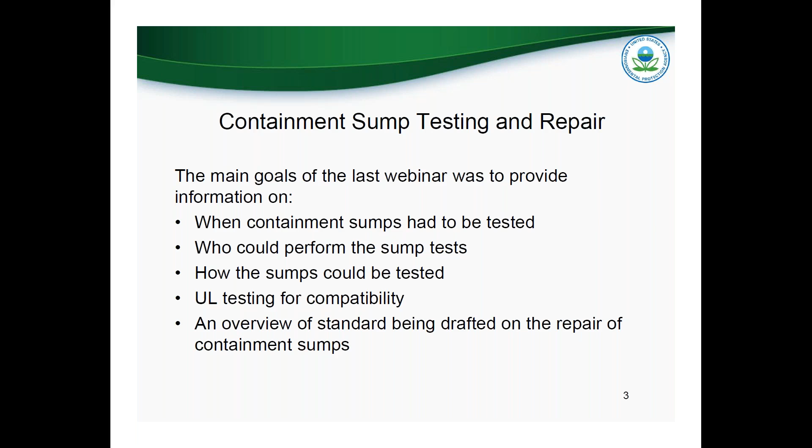The main goal of that last webinar was to really get into when containment sumps had to be tested, who could do the sump tests, how the tests could be conducted, a little bit on compatibility, but to introduce the overview of the standard being drafted. We're building on that today, looking at the containment sump repair. As Drew mentioned, I'm going to start off taking a look at some requirements for containment sumps and moving into what about repairs of those sumps.

Tony Rieck is going to come and really do a wonderful detailed job walking us through the standard itself, looking at a couple of key issues like what sumps can be repaired and what are those allowable methods that can be used. And Ed Kubinsky is really going to come in with some really wonderful examples of sumps that can be repaired, sumps that can't be repaired. And so we're really going to hopefully answer a lot of questions here.

So as I said, I'm starting off with some requirements. So the first aspect of the requirements is when are containment sumps required? So everybody should be hopefully familiar. New dispensers, when they're installed, they have to have under dispenser containment. And if the owner operator is going to be using release detection in the form of interstitial monitoring, they're going to need to have a place to do the monitoring, and that's going to be typically the containment sump.

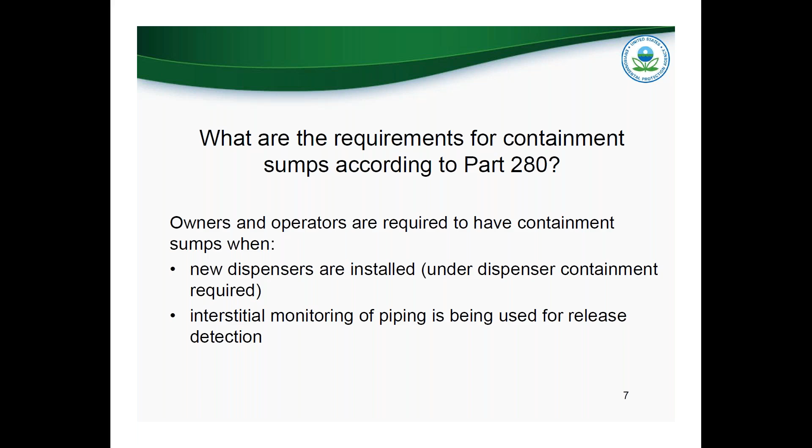So when we have sumps out in the field, what are owners and operators required to do with these sumps? Well, the one that we took a look at before was testing. And I really encourage, if you need more understanding of when sumps have to be tested, when they don't have to be tested, please go back and look at that webinar.

But the other aspect that we didn't touch on before is all people that have these containment sumps are required to do walkthrough inspections. Those walkthrough inspections are for every operational containment sump. With one caveat, if there's an under-dispenser containment that has to be filled with pea gravel or somehow inaccessible for a visual inspection, those have to be electronically monitored for leaks. They really can't have a visual inspection.

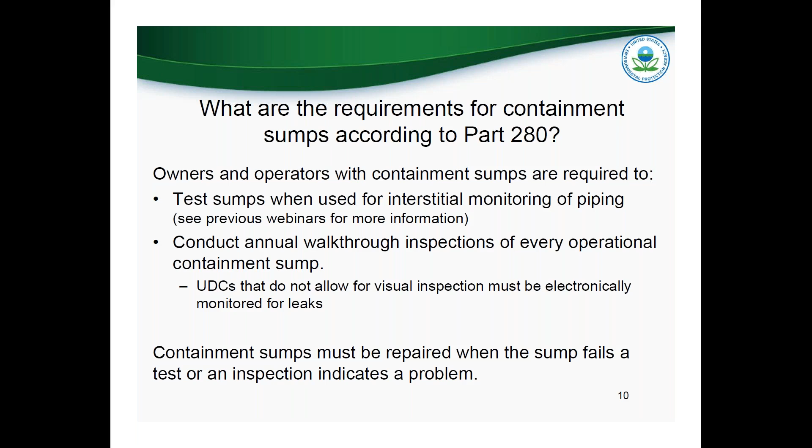But the important thing is, as we're working with these containment sumps, they have to be repaired. When the sump fails a test, or they get out there and do an inspection, and the inspection indicates a problem, there has to be a repair completed. Which brings us to today's session, really.

So the repair of containment sumps is addressed in 280.33. A couple of things to be aware of: one, it has to prevent releases due to structural failure or corrosion, so it has to be a good repair. The second point is that it has to be properly conducted in accordance with a code of practice.

Now, if you remember the other parts of the regulation, there's a lot of times where there's options presented, so it could be a code of practice, a manufacturer's instructions, or something the implementing agency allows. When it comes to repair, those are not options. What we're dealing with here is it has to be done in accordance with the code of practice.

Second part to that is, up until now, there's really not been a code of practice for the repair of containment sumps. EPA got involved with NLPA and other groups to try and come up with this standard, and we're very happy that NLPA did a lot of great work to pull this standard together.

Last point on the repair of containment sumps, it's not directly in 280.33, but keep in mind that whenever a sump is repaired, that repair has to be compatible with the substance stored, and there's going to be a need for records if it's going to be more than E10 or B20.

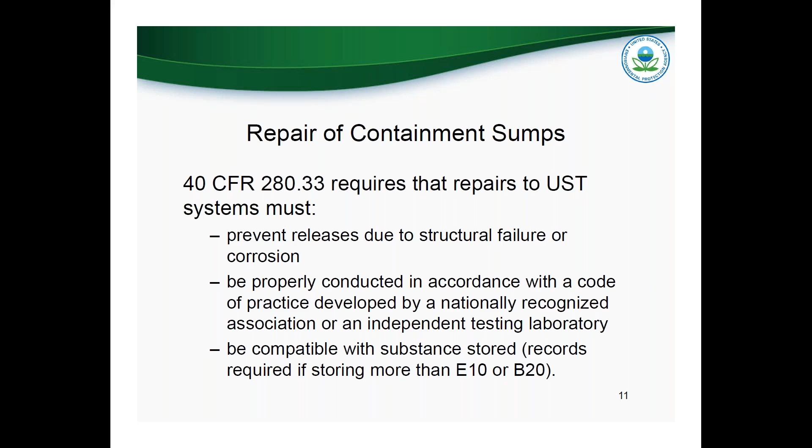Last part of the repair of containment sumps is looking at the aspect of when it gets done, there needs to be a test. Now, the test is required specifically for repairs of containment sumps used for interstitial monitoring of piping.

But obviously, if a repair is done and it's needing to be repaired, it's a good idea to get it tested. With the test, options are provided: manufacturer's instructions, the code of practice, or other requirements developed by the implementing agency. The code of practice has the standards in there for how it's to be tested, and we certainly encourage the use of that code of practice.

Last but not least, everybody should be aware the technical compendium is out there, and EPA did recognize the standard. We have a new section in the compendium dealing with repairs of UST systems, and that is explained in more detail at that point. So that's the quick overview, taking a look at the regulatory framework for UST repairs, in particular for containment sumps.

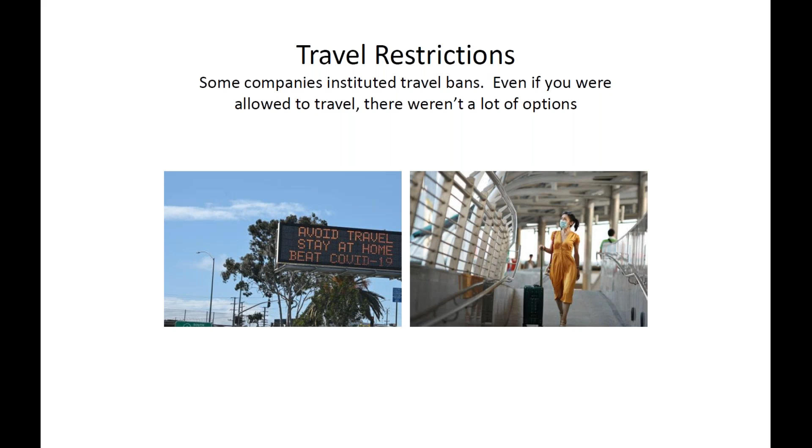So not a lot of people flying, risks of mandatory quarantines, limited food options while traveling. That just really meant that there weren't going to be the same meetings that could otherwise occur. So the meetings had to change.

And we have people that were working from home. We had people that were on different platforms as far as the meetings. Every company seemed to have its own platform, and sometimes they weren't compatible with one another. And so meetings were different.

And not all of the things that changed were compliant with the NLPA Standard Development Protocol. The NLPA Standard Development Procedure requires a minimum of 2 meetings. The first is an organizational meeting of the committee, and the second is a ratification meeting to consider comments and formally approve the standard. We did eventually get both of those meetings in.

The first one wasn't so hard because it happened right before COVID became a major concern. And it's really important to understand how meetings help. Face-to-face, there's no substitute for being able to sit down with people and actually hash out issues.

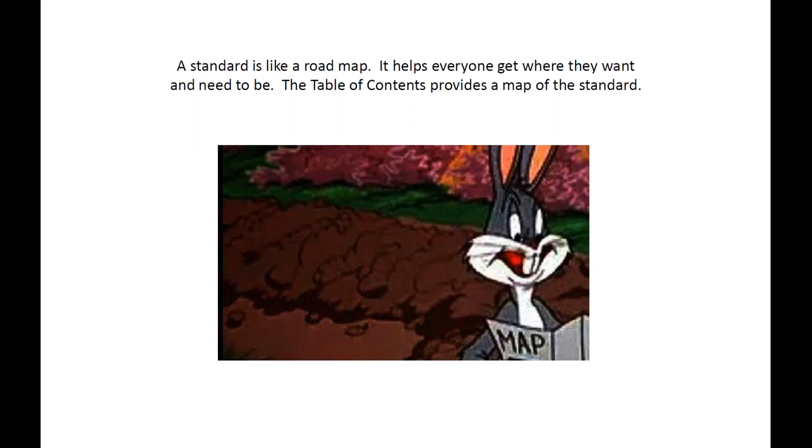Well, my view of a standard is it's like a roadmap. It helps people get to where they need to be. The table of contents is a map of the standard. And here are the different things which were addressed, and I'm going to go into each of them individually.

Introduction, scope, reference documents, terminology and definitions, which you find in just about every standard. Significance and use simply says how to use the standard. Permits, plans, testing for tightness, and final report.

Material approvals, sump evaluation, training and certification of installers, general safety considerations, sump fittings, procedures common to all work, sump structural repair, in-situ sump construction, sump fitting installation, repair, replacement, or construction of sump lids, testing and return to service, sumps made from other materials of construction, and keywords, and then finally contact information for the association.

So there were 4 methodologies addressed in the standard. One was sump structural damage repair with applicable structural adhesive bonders or patches. 2, repair or replacement of sump entry and test fittings. 3, field constructing a retrofit single wall or double wall sump without removal of the existing sump. And 4, repair or replacement of sump lid assemblies to address surface water intrusion.

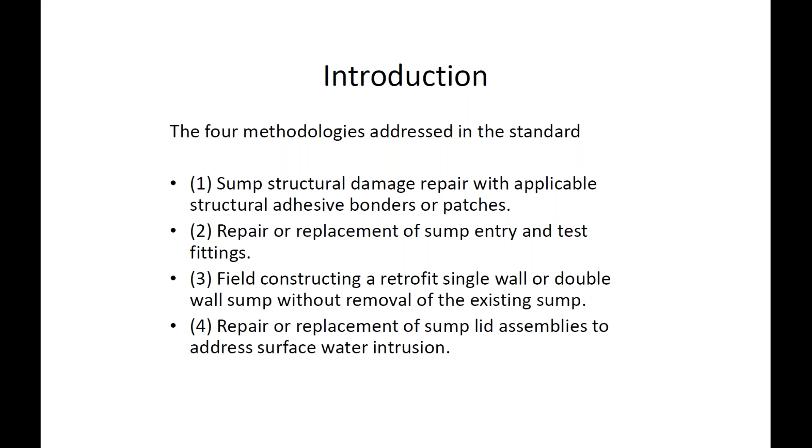Our scope simply was the intent of the standard. The repairs to sumps need to be performed in conjunction with or independently from replacement of or repair sump fittings. In other words, you may have to replace sump fittings. You may not have to replace sump fittings. You may have to repair a crack or a hole from impact.

That might not correspond with the sump fitting needing replacement. Sump penetration fittings may be installed or replaced independently or in conjunction with other procedures contained in this standard.

A watertight lid assembly was something we wanted to talk about, because one of the ways water gets into the sump is through the top. And of course, in-situ sump manufacturing simply uses the existing sump as a mold for the fabrication of a new sump.

Strength and flexibility. The strength is in the language. You want language that is truly enforceable, using words such as will, must, and shall, to make it easy for the standard to become adopted and enforced.

Flexibility is also required because what exists today might not reflect what's available tomorrow. For example, when the recommended practice was written, there was no such thing as a repair fitting.

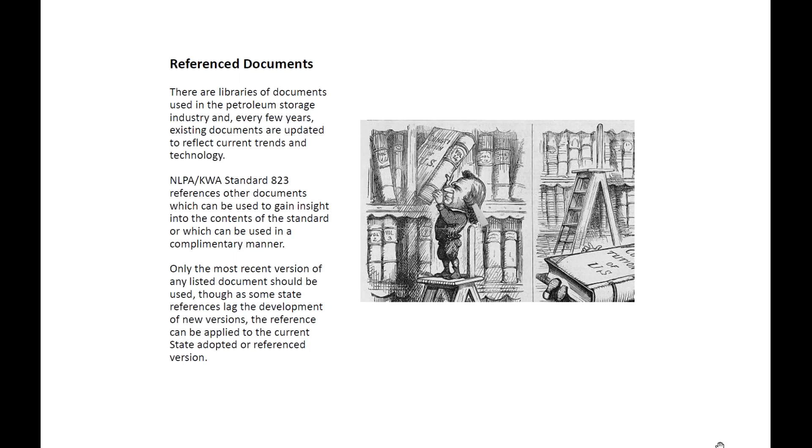Terms and definitions. We wanted to make sure that the definitions we used for terms consistently used within the industry were the same as those for other groups that have standards and recommended practices out there. PEI, API, and NFPA, for example—we checked their definitions against ours to make sure they were at least pretty close, if not exactly the same.

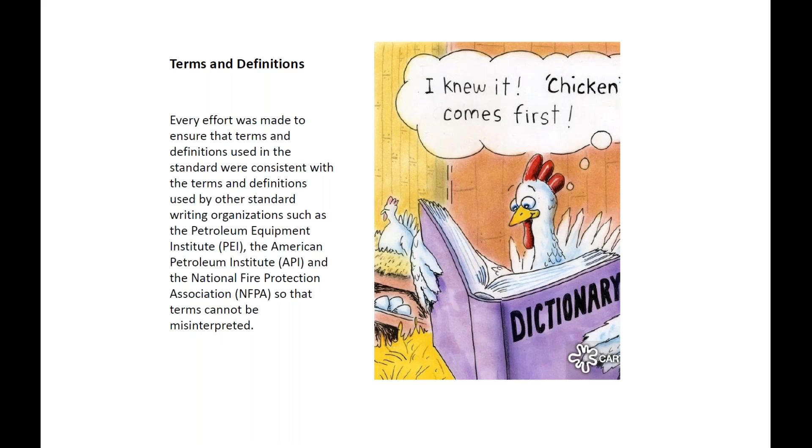Significance and use simply says what the standard provides and how it's to be used. So the standard provides testing and performance requirements for materials used to perform sealing of containment sumps. It provides testing and performance requirements for materials used to perform repairs.

It provides minimum criteria for qualifying a containment sump for repair. And the standard provides test and performance requirements for materials used to perform the installation or replacement of a sump entry fitting, not only from a compatibility standpoint, but also from a standpoint of suitability for use.

The standard provides testing and performance requirements for materials used to perform the fabrication of that new single wall or double wall sump, using the existing sump as a fabrication mold. It provides minimum requirements for installer certification and training by the equipment or material manufacturer, which the manufacturers felt was really important—they've designed these materials and equipment for field use, but want to make sure it's installed properly so it doesn't get a bad reputation.

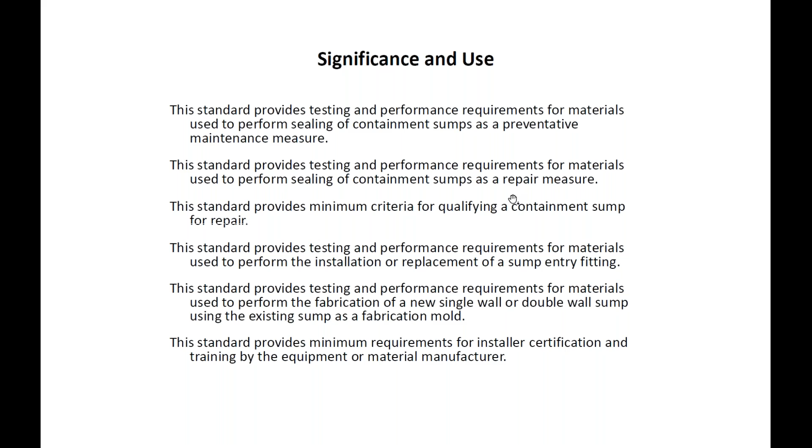And of course, you have to comply with all the rules and regulations for the jurisdiction where you're performing the work. Part of that is making sure you have proper permits, that your plans are approved, and that you're testing for tightness upon completion of the work in order to assure the regulatory agency that the work was done appropriately.

Material approvals. Like I said before, the standard requires all materials to be tested for compatibility, but also tested for suitability for use as to its performance in its intended utilization.

Compatibility assurance is based upon laboratory testing and attestation by the manufacturer. Both are required under the standard. EPA regulations allow for the manufacturer simply to attest that the material is compatible. The standard requires that the manufacturer base that attestation on independent third-party testing in order to make sure there's a basis for that attestation.

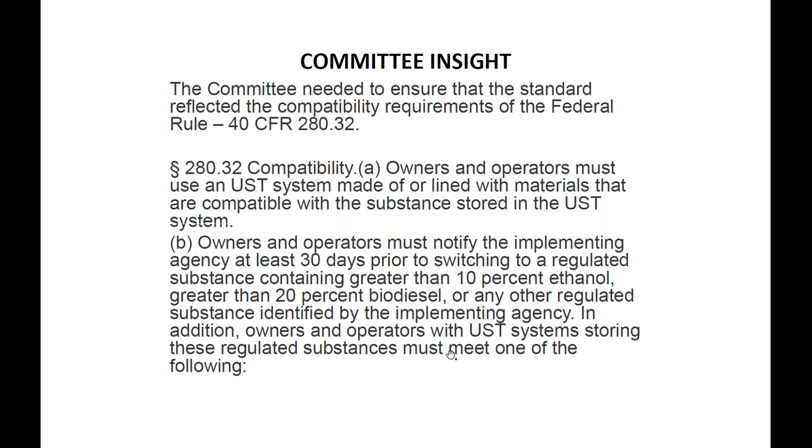And there were different ways of demonstrating compatibility with the UST system. One of those said that equipment or component manufacturer approval must be in writing, indicate an affirmative statement of compatibility, specify the range of biofuel blends the equipment or component is compatible with, and be from the equipment or component manufacturer. So that's basically just saying the manufacturer can say, yeah, this is compatible.

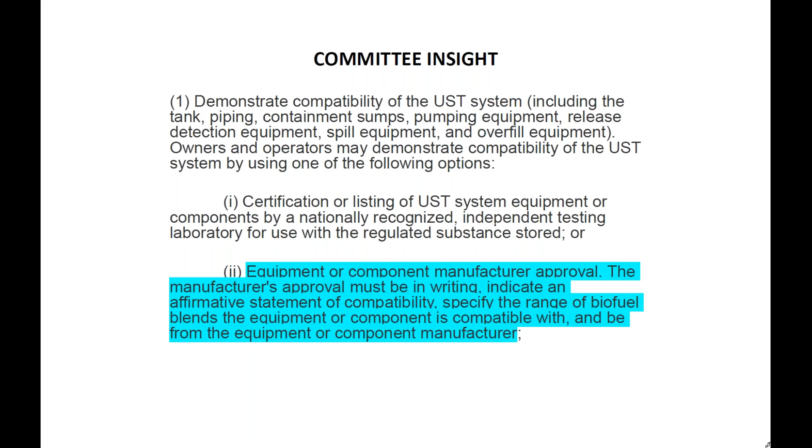The standard, however, said that we want a little bit more than that. We wanted the manufacturer statement of compatibility to be based on third-party laboratory testing results. Now, that doesn't have 'nationally recognized' in there, because that's sort of limiting. This opens the door to the use of regional or local laboratories who have the equipment and expertise to make the determinations, following test procedures as, for example, laid out by ASTM.

So our agreed upon language was: the manufacturer shall attest in writing to the compatibility of the equipment, component, or material, including a specific and stated range of biofuel blends, based upon the results of testing performed by a qualified independent testing laboratory. Additionally, the committee agreed that compatibility assurance alone was not enough, that the testing had to determine that the material...

Your audio dropped there again, Tony. This is Drew, sorry to interrupt. We lost you at the materials testing. We'll hang tight and hope it comes back. Still no audio. Still not hearing anything from you, Tony. I'm not touching anything, so I don't know. We're hearing you now, I think it might somehow be your connection with your phone, but thankfully it's coming back. We're having power issues here. There's a power drop every now and again, I can see the lights go off on my backup power. So that might be it.

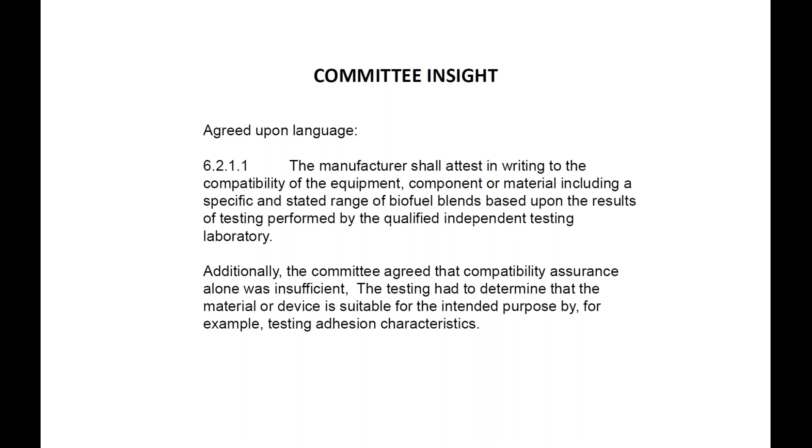Sump evaluation: the question becomes, is it broken beyond repair? Fiberglass materials are very amenable to repairs. Unless you have something really strange happening with a fiberglass sump, you can almost always add more fiberglass and resin in order to make a repair. There are exceptions, such as a fitting that's right up against the wall of the sump, which makes it so you don't have access to the area to repair it.

But polyethylene sump repairs were looked at differently. Polyethylene is defined in some sources as a non-cementable material. Simply, what that means is that you can't glue stuff to it. So when the recommended practice was out there, there was a prohibition about repairing polyethylene sumps, because there was no material known to be able to repair a crack or a hole in a polyethylene sump.

Well, lo and behold, several different manufacturers have developed materials which can be used in order to fusion bond a polyethylene sump. And it's not the heat-treated polyethylene bond that the polyethylene industry utilizes, but rather a chemical process which melts the surface of the polyethylene sump and allows the repair material to mix with the polyethylene material and creates both a mechanical and a chemical bond.

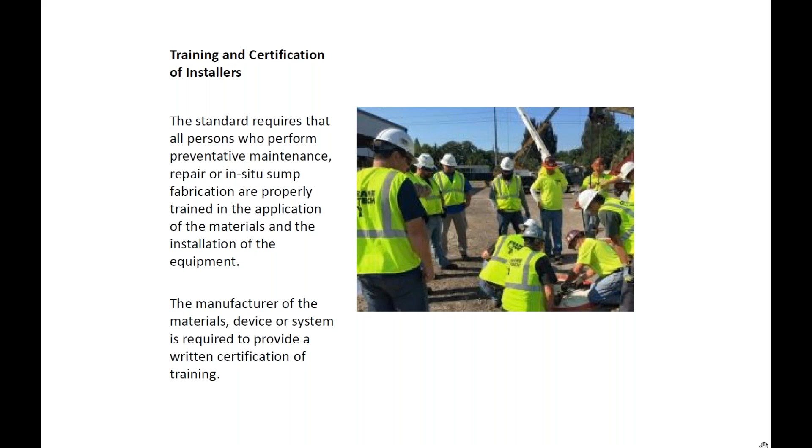And of course, we have general safety requirements. Every time I put on a safety class, I understand that the biggest concern of petroleum contractors is John Q. Public. How do we keep John Q. Public from driving their vehicle into an excavation? How do we get them to not flick cigarette butts into the sump we're working in? And some safety considerations aren't exactly possible to enforce. You can't legislate common sense.

And while I said it's impossible to anticipate every safety need in a complex and varied workplace, the basic guidelines for safety, such as being able to provide barricades to separate the workplace from the public access, were included within the standard, along with things like lockout and tagout, traffic control, and personal protective equipment considerations.

So sump fittings. Well, there's a lot of different types of sump fittings. And it wasn't until I was on this committee that I realized how many different types of sump fittings there were. Sump penetrations seal piping or conduit that enter or leave the sump, or seal between primary and secondary interstitial openings. There's encapsulating and replacement repair fittings. There's quite a few different solutions that have been developed in order to meet the needs for sump repair.

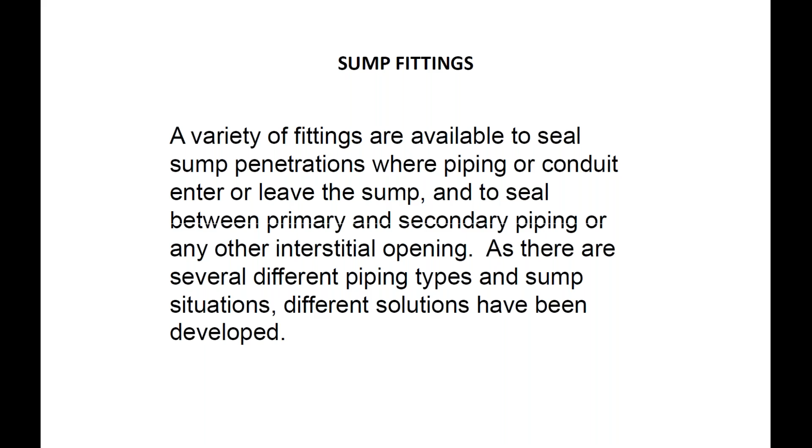Here's what we call a split repair fitting. Split repair fittings allow for repair without disconnecting the piping. That means you don't have to have a separate contractor in there lots of the time in order to take the piping apart so you can get a fitting on there. Split repair fittings can be entry fittings, test fittings, or even a combination of entry and test fittings.

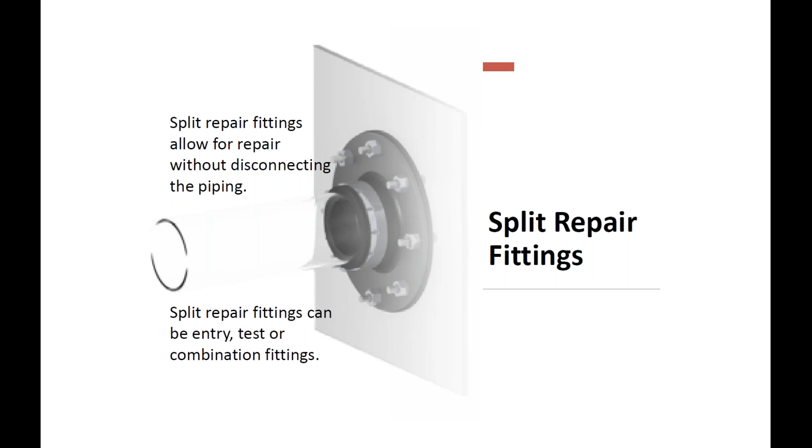Now, this is what we call an encapsulating fitting. This doesn't require the complete removal of the existing fitting. Of course, if there's a space that needs to be monitored, you need to make sure that that pathway remains open, and so partial removal of the fitting may be required. But this one simply is bigger than the existing fitting and fits right over it.

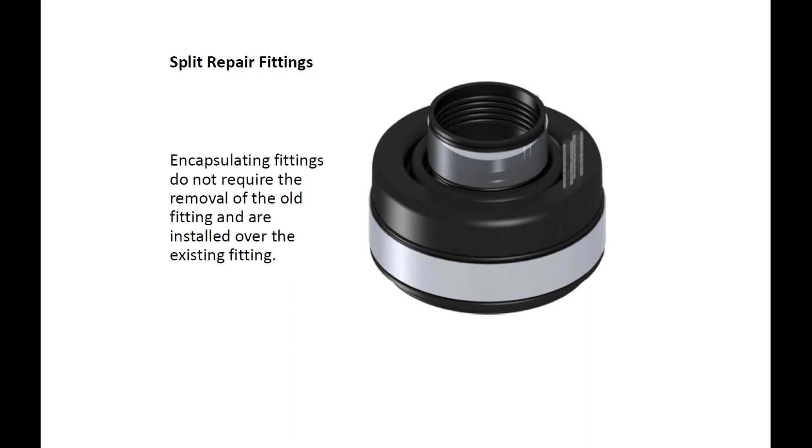Then you have split repair fittings, which are combination fittings. Here you've got a reducing fitting, and you've got the ability to monitor the interstitial space between the piping.

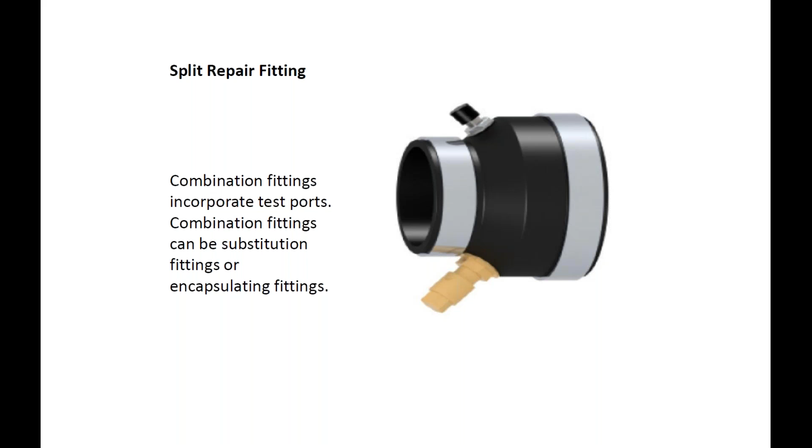And you have special situations, two conduits coming through an existing opening. And here you have specialized fittings which can be used to seal two different conduits coming through the same piping. So there's a lot of different situations out there, and like I said, there are an awful lot of different types of repair and replace.

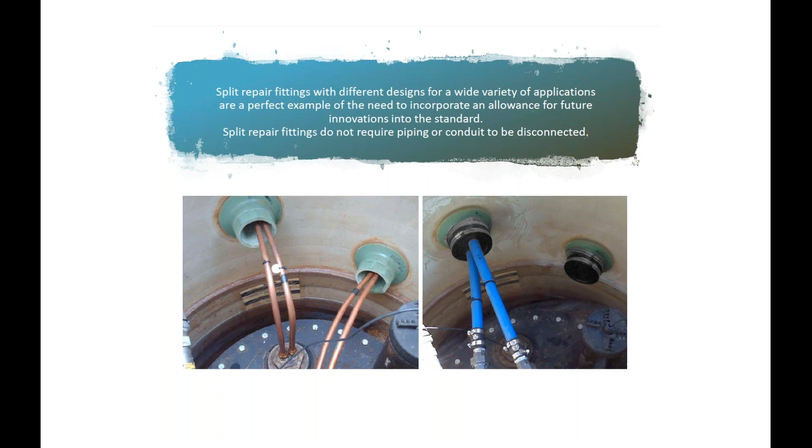We're having another audio issue here, Tony. Just wanted to let you know. Can't hear you. I'll let you know when you are audible again. Hopefully that works again. Yeah, hopefully that was just another power surge. So thanks everyone for bearing with us in the virtual world. Still not hearing you now, Tony, but I'll let you know when I do. No audio for the moment. Fingers crossed it comes back. And you're back. Go ahead.

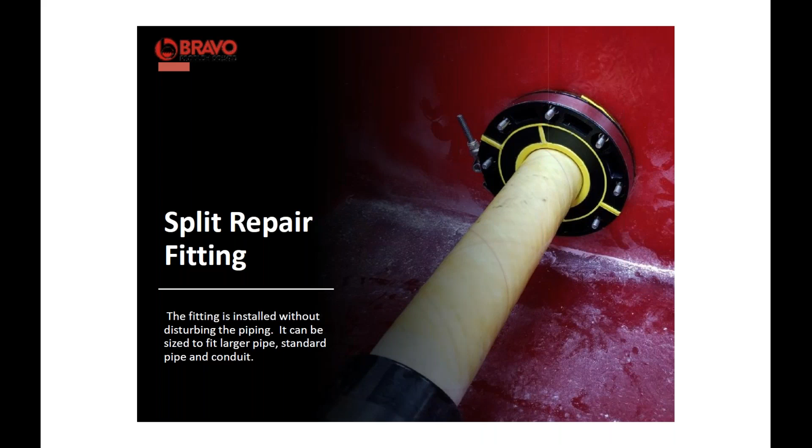So a procedure is simply a work practice. General procedures for the following kinds of work are provided. Work practices that are applicable to all work. In other words, it doesn't matter what you're doing with the sump, these practices apply. Practices applicable to fiberglass sump repair. Practices applicable to polyethylene sump repair. Practices applicable to in-situ sump construction. And work practices that are applicable to fitting installation.

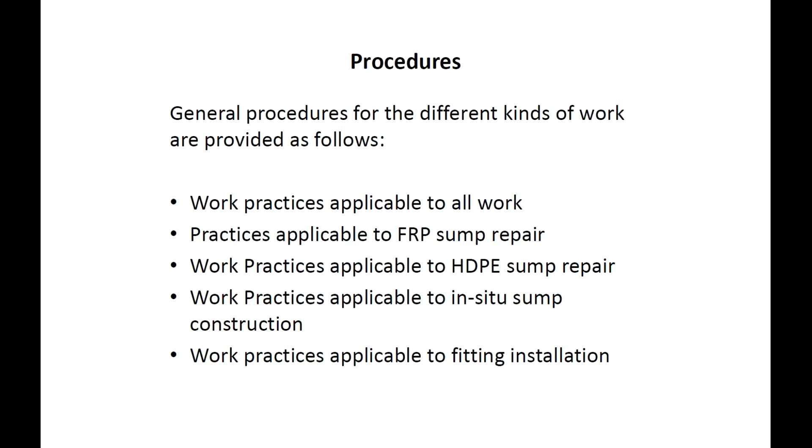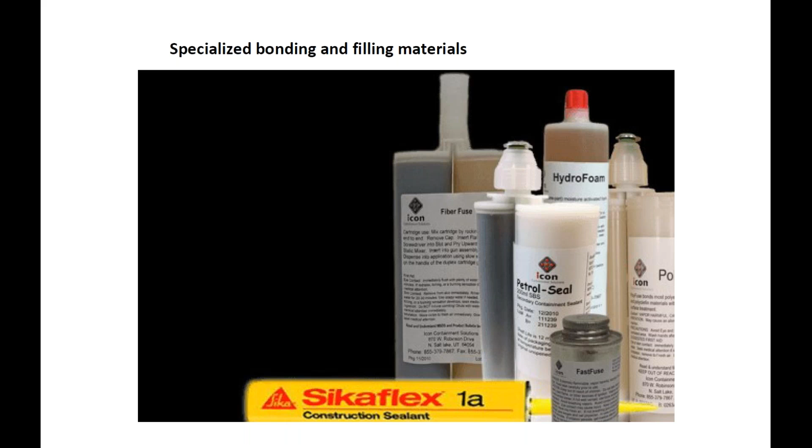I talked about these specialized bonding materials. These aren't caulk. They aren't sealants. They are structural bonders. In other words, they themselves become solid materials, and they bond to the material that is supposed to be repaired. Different materials for different constructions of sumps. For example, here's a two-part system used for FRP sump repair. So you can get cracks in FRP sumps and areas of small damage. Those can be repaired using structural bonding materials. The bonding material becomes a hard surface which can bridge small holes.

Larger repairs are performed using fiberglass cloth and resin, which is applied to the fiberglass sump laminate and bonds to it. In both cases, proper surface preparation is key to a successful repair. We're going to hear that over and over again because it's true with every material. You can't apply a coating to something that hasn't been properly prepared and expect it to work well. It's like expecting that you have peeling paint on your windows and you're going to paint over it. That just simply means that your paint is adhering to paint chips which are disbonded and ready to fall off.

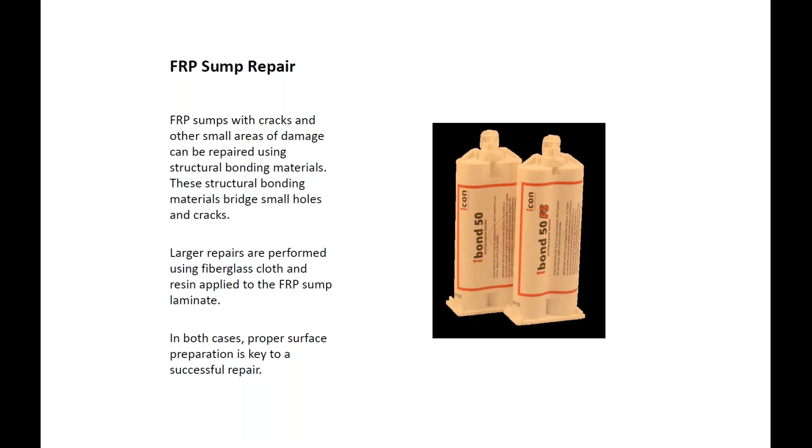And so, of course, those are different than the fusion materials, and you'll see that the title of this is Polyfuse, that are used for polyethylene sumps. As I said, polyethylene is considered to be non-cementable, which means you can't glue stuff to it. But there are these chemicals which have been developed which will melt themselves into the surface of the polyethylene in order to be able to create the bond that's necessary to repair the polyethylene sumps.

And then you have in-situ sump construction, and this is where you take a fiberglass and resin material and you follow the contours of the existing sump in order to be able to create a new sump within the old sump, which is not dependent upon the original sump structure. One advantage that I see to this is that there's no disposal of the old sump. Another is that you don't have to dig up the lot and close down the station.

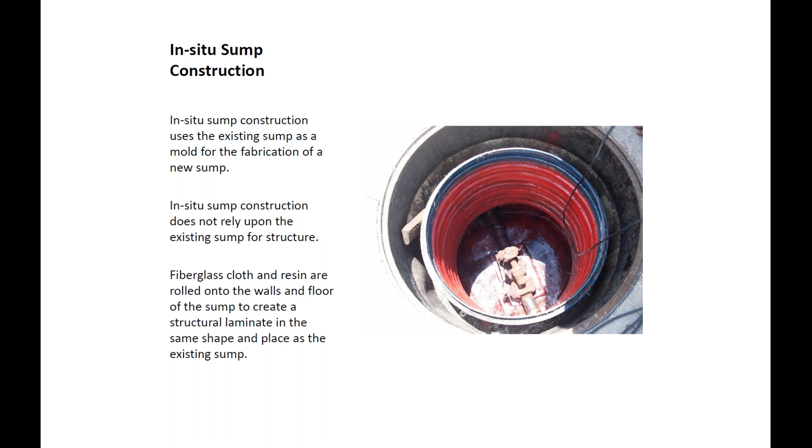So, sump fitting installation. Well, all materials used to seal, bond, and attach sump fittings need to meet the requirements of Section 6 of the standard. That's the material testing section, and it's applicable to almost every section of this standard, including that for alternative materials such as concrete or metallic sumps, which do exist out in the field.

Equipment and devices installed as part of the repair shall be tested by a qualified independent testing laboratory and approved by the repair method manufacturer for their intended use. That just simply says that they can do what they're supposed to do. Not that they're compatible, but that they can do what they're supposed to do. They're also required to be tested to make sure that they are compatible.

The installation work needs to be performed by a qualified contractor or installer who's properly trained in the installation procedure by the manufacturer of that sump fitting and in accordance with the procedure set forward by that manufacturer.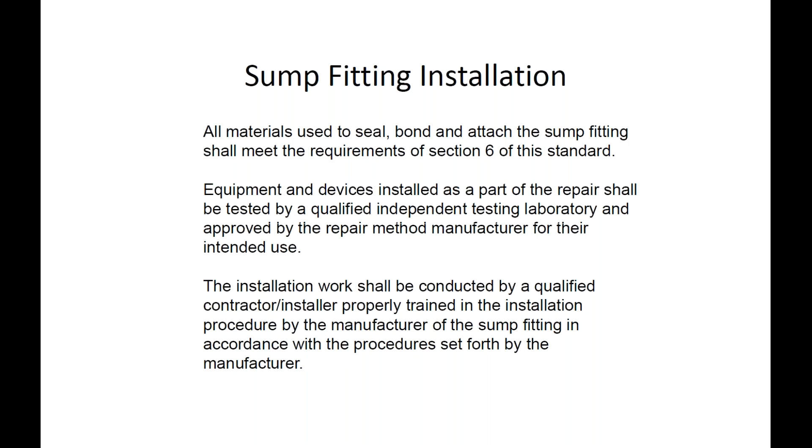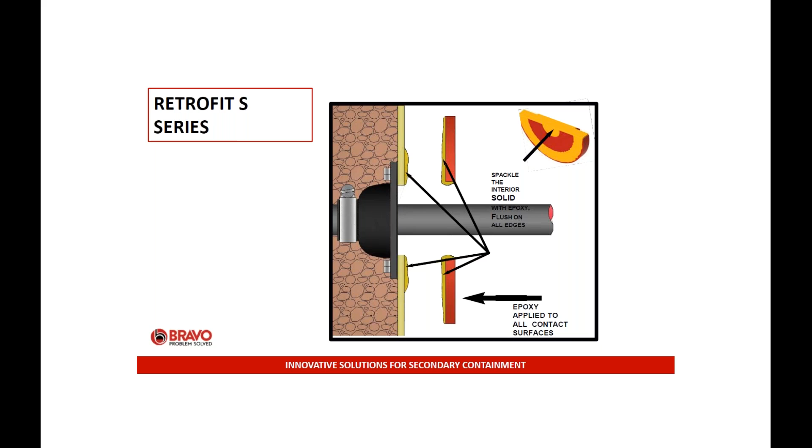So here's an example of a procedure. This is how this is supposed to be done. It shows where you're supposed to put the adhesive materials on each of the bonding pieces, and it shows the basic way that it's applied to the existing sump and piping. And when it's done, it looks like it belongs there.

Watertight lids. Well, some of these lids have been tested by flooding after hurricanes. And it's sort of an interesting thing that you can now have sump lids that when the sump's underwater, water doesn't get to the inside of the sump. So where water can enter through a poorly fitted, broken, deteriorated, or even missing sump lid, you need to install a watertight lid to keep the water out of the sump.

Most of the designs include revamping of the top of the sump in order to create a better sealing surface. Mechanical attachments compress the lid against the newly created sealing surface in this instance. Or you can have lids which become part of the sump. With the in-situ manufacturing of sumps, this lid system can be applied, and it becomes an integral part of the actual reconstructed or newly constructed sump.

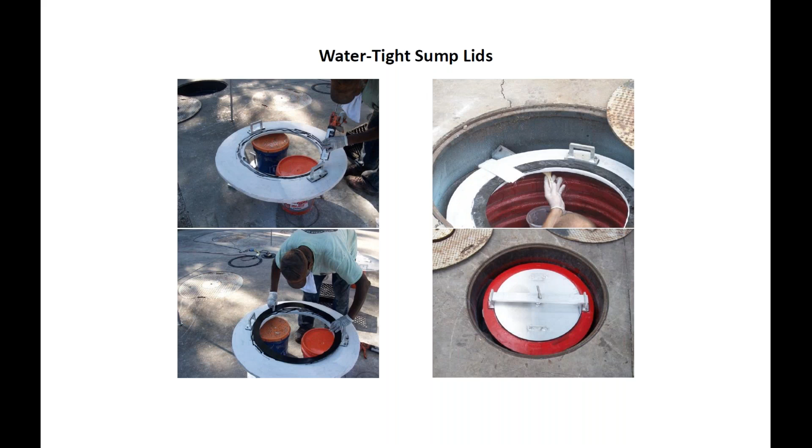Prior to being returned to service, you want to make sure that the sump is capable of containing any product within it and won't allow water outside of the sump to get inside. The NLPA KWA standard provides two options for the sump and procedure for testing a watertight lid.

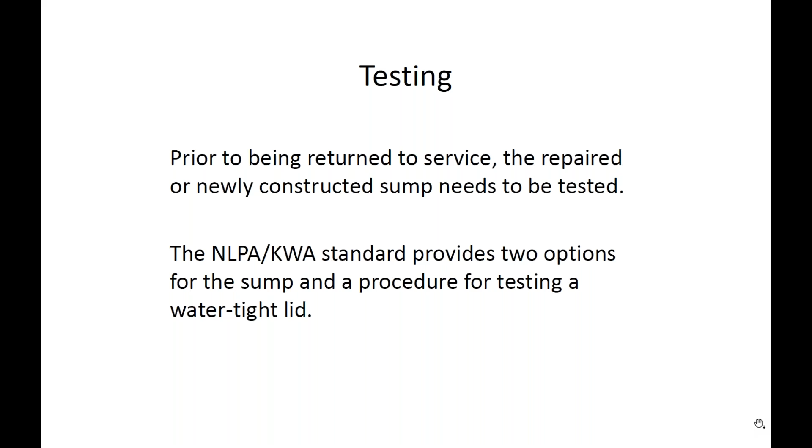A full hydrostatic test is option number 1. The committee agreed that only a hydrostatic test where the water level is no less than 4 inches above the highest sump penetration or side assembly seam is appropriate for the testing of a repaired or in situ constructed sump prior to being returned to or placed in service.

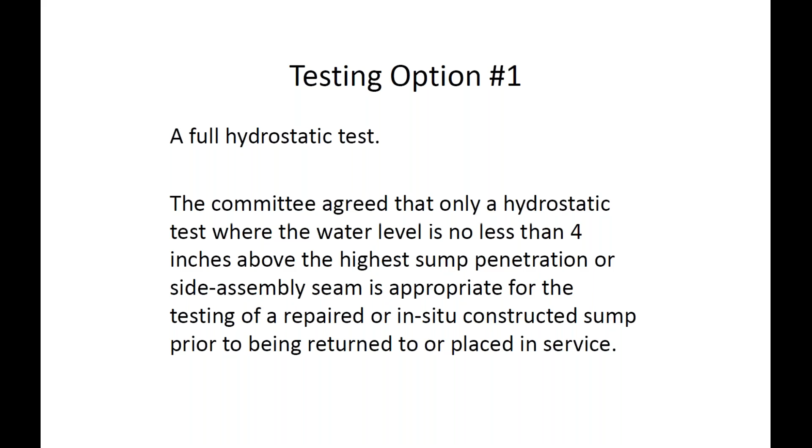Option 2 simply says that there are other methods, and may yet be even more methods developed, which can detect a leak of substance through the sump wall. We have hydrostatic tests that everybody's familiar with and comfortable with, except for your airport authorities, for example, that don't like to have water anywhere near their tanks.

And there's a company, I guess, that does dry sump testing now using a fog, and many states have approved that. And so we don't want to limit what the authority having jurisdiction has deemed to be no less protective of the environment. And we don't want to make it so that some new technology, which is a better widget than exists today, is prohibited. And so here, this shows the actual testing of a sump lid.

A lot of sumps are buried in materials that don't allow for the water level to be held at a level above the top of the sump lid. So recognizing this, the standard committee thought that a large volume of water applied to the sump lid area over a period

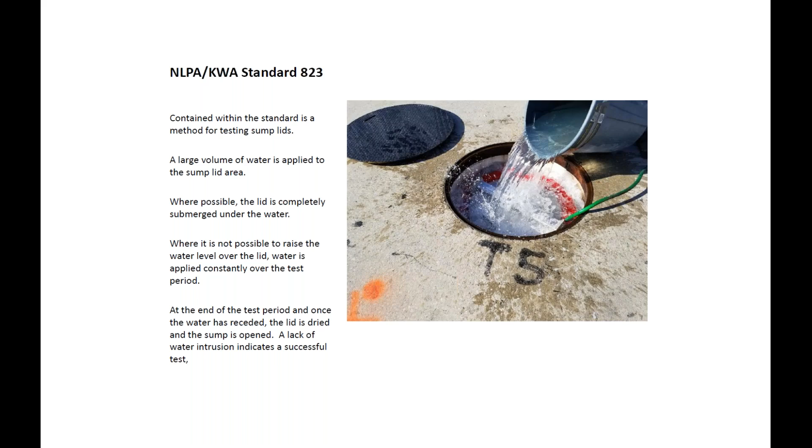Of course, not all sumps are made out of polyethylene or fiberglass. Some of these are called vaults, others are called sumps, but they have the same basic requirements and do the same things. They require maintenance and repair on occasion, and again, the standard points to Section 6 for materials testing in order to show that the material used in the repair is suitable for that repair and compatible with the product it might be exposed to.

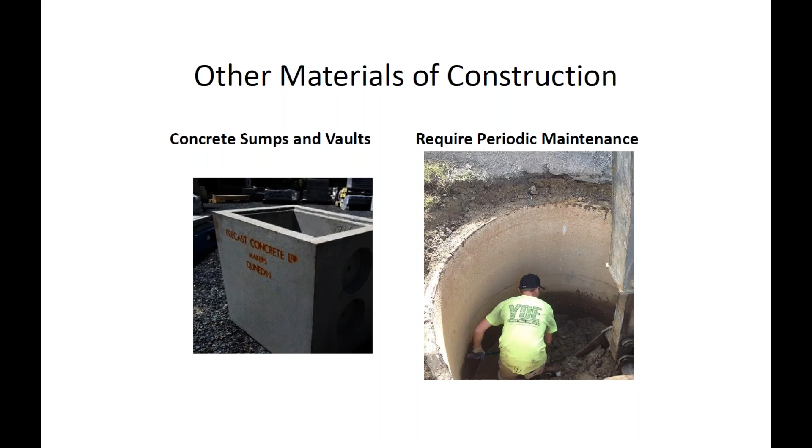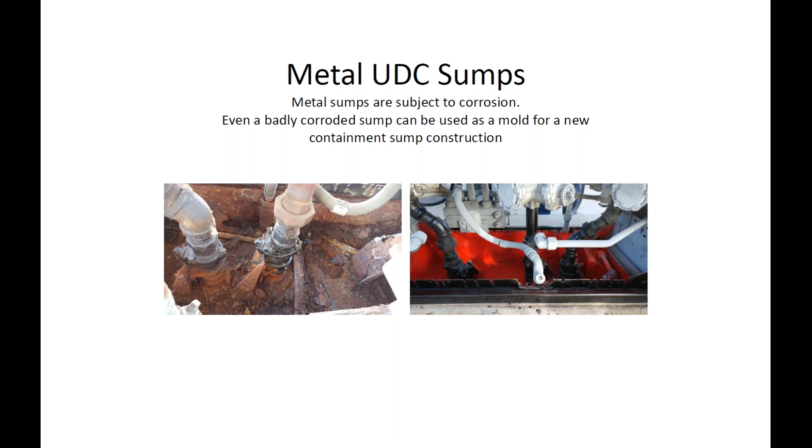With that, I guess that means if anybody has any questions, I'm open to trying to answer them.

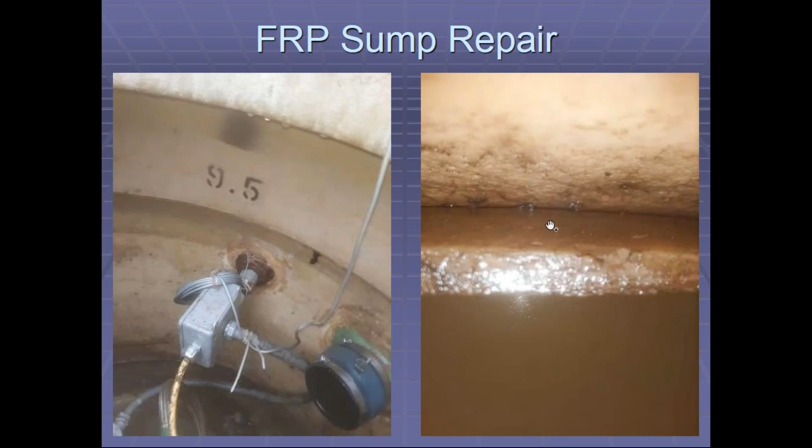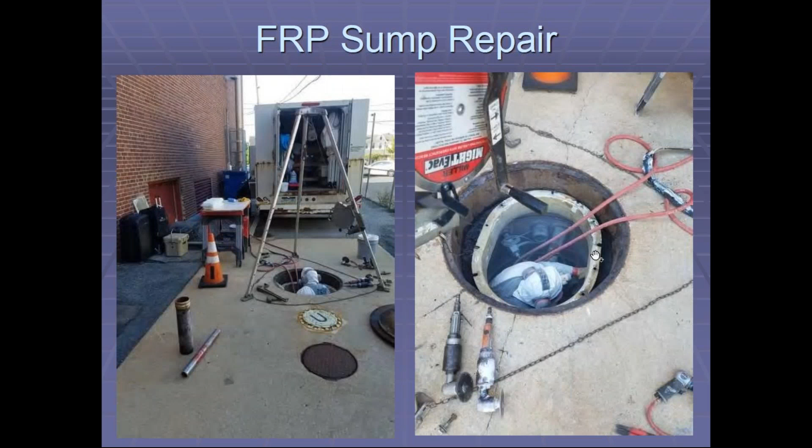So here we're going to get into some of the repairs that we've recently seen in the past couple months. This is a fiberglass sump that was in need of repair. We had a little bit of a seam separation, and we also had a large crack in this sump. Here you can see a large seam separation that needed to be repaired. In this case, we actually had to have the fiberglass tank sump manufacturer come out and do the job.

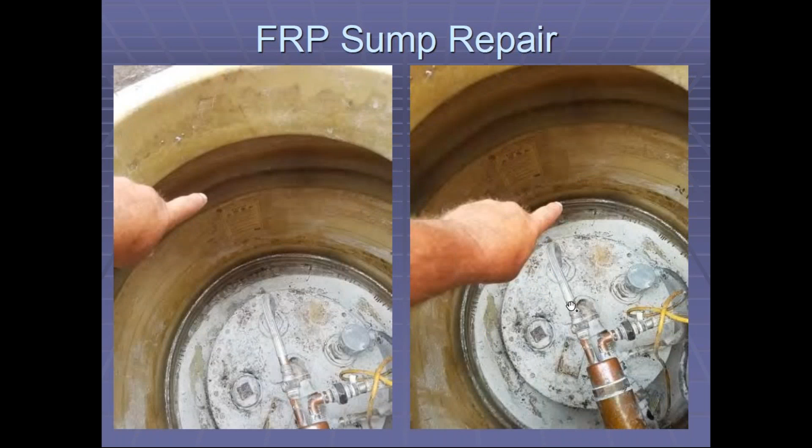We were the certified company and certified technicians on site that oversaw the repair. You can see the guy in the sump here doing some of his prep work, sanding down the fiberglass sump in order to prepare to make his repair. You can see some of the pointing out where the problems are in the sumps. And here you can see what the repair looked like afterward, a bunch of laying up of fiberglass material over that crack in order to make the repair.

And as Tony stated in his presentation, there is no limitation in the structural repairs of fiberglass sumps, because you can lay up a lot of this material and seal up cracks and holes in the sumps. Probably the more common repairs that we see are polyethylene sump repairs.

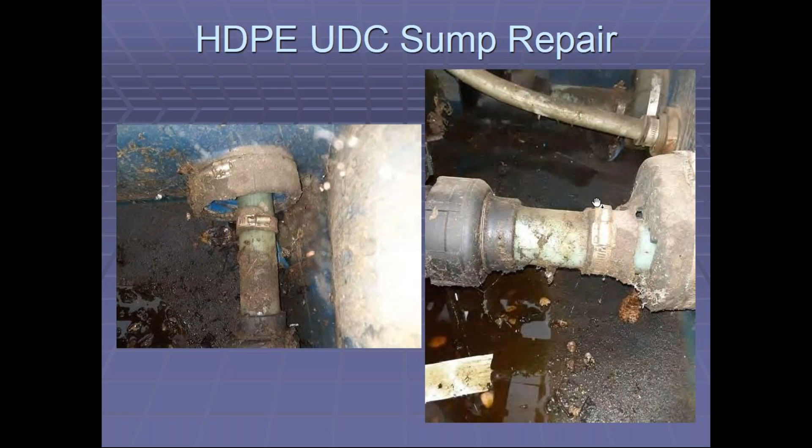As you all know, we need to make these sumps liquid tight when interstitial monitoring is being used as the primary form of release detection. We need to make these sumps liquid tight in order to do a test. Over time, these old penetration boots tend to rot, crack, and fall apart. And when we come out to do a containment sump test, a lot of times this is what we see. Obviously, we need to make some repairs in order to properly test this containment sump, because as it states in RP 1200, you need to be able to seal off these sumps in order to do a hydrostatic test.

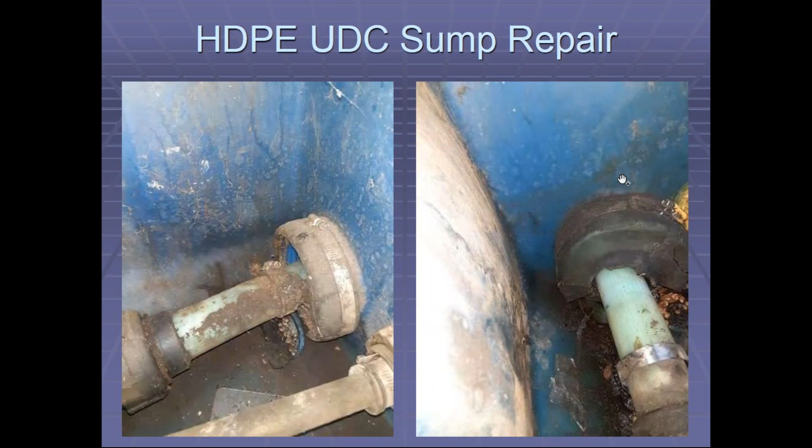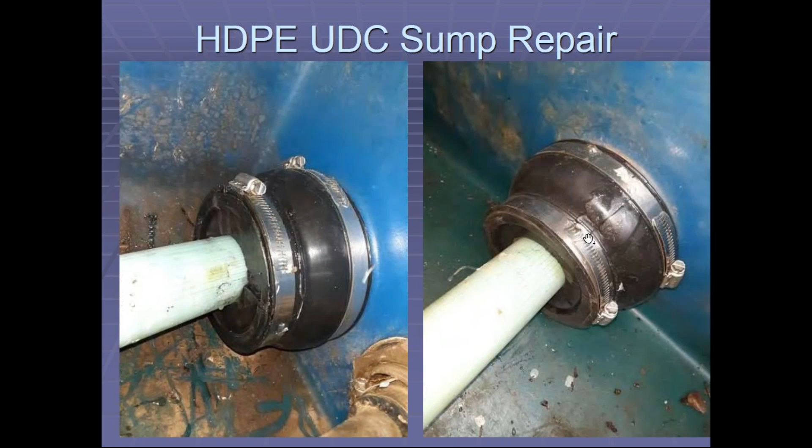So first thing in this case, we need to get rid of all the old penetration fitting that's falling off. We're going to have to get down there and peel it away, break it off, remove all the old materials in order to get access to the fitting itself, and use what we used here, and what we most commonly use, these split repair fittings that Tony had mentioned in his presentation. As you can see, this piping is nicely sealed now. The repair is done properly, and we can now run a hydrostatic test of this sump. It's what a good repair looks like when it's done, nice and clean.

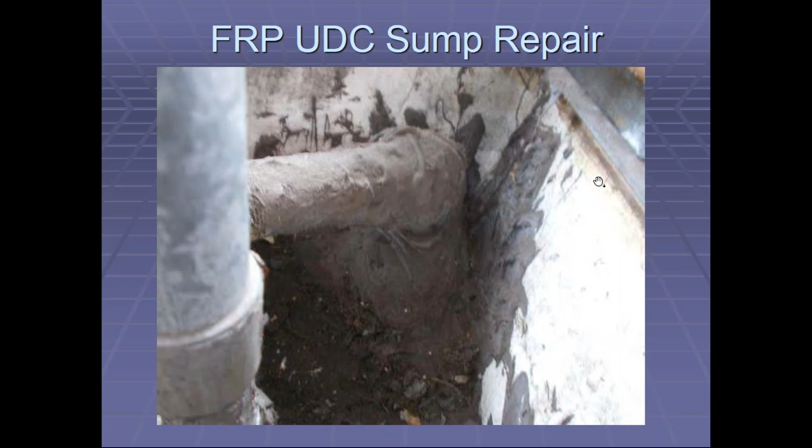Here's a containment sump where there was a question about mastic materials and all kinds of materials being smeared over fittings in order to make these sumps liquid tight. Here we have a sump that failed that had all that type of material. We pulled a bunch of that gooped-on material off the sump, and this is what it looked like when we removed the old failed fitting and all that gooped up material around the fitting that had been used to seal it over years and years.

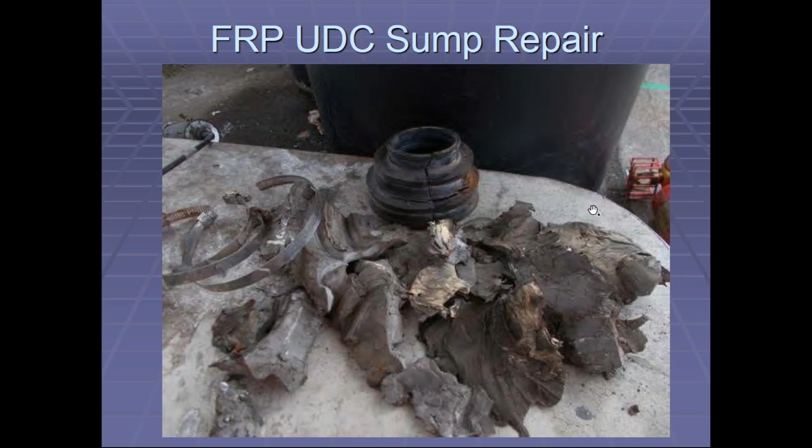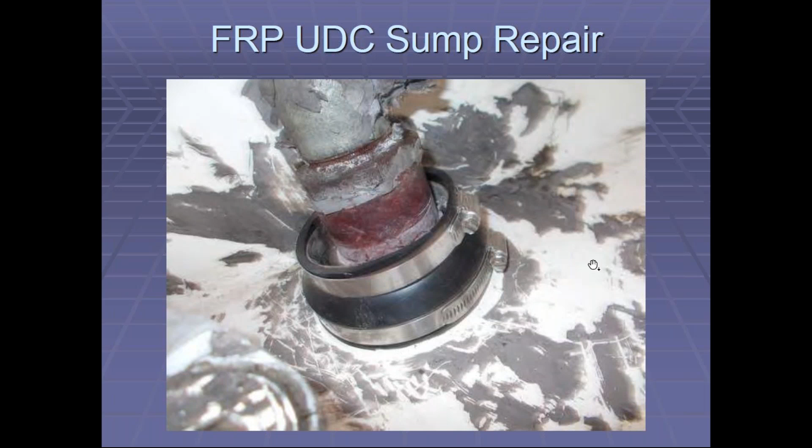Now we're going to do a proper repair to this under dispenser containment sump. Surface preparation is pretty important, getting as much of that old material off and sanding it down, putting on the split repair fitting, and properly sealing that fitting. Had to do a number of fittings inside this under dispenser containment sump. Fortunately, this one is rather shallow, so it wasn't terribly difficult to make the repair.

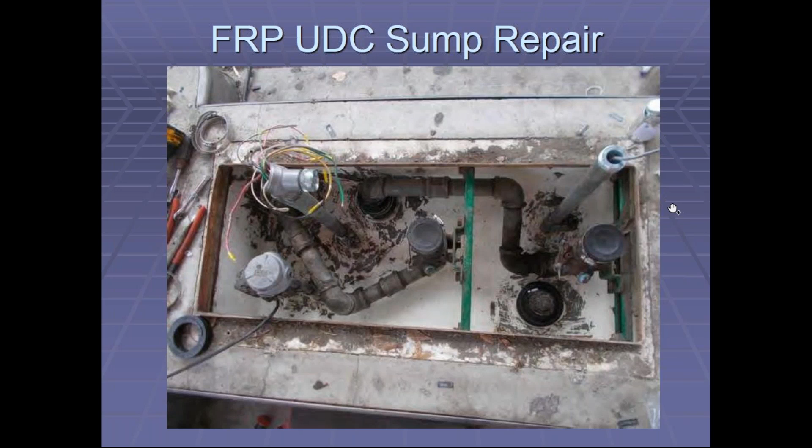As you can see here, and oftentimes anytime we're doing under dispenser containment repairs, we do need to remove the dispenser in order to make this repair. There's quite a bit of piping here before the shear valve, so this dispenser sump will need to be tested periodically because it is being used for interstitial monitoring. That single wall steel piping you see is all part of the piping that needs release detection. If you're doing interstitial monitoring on this under dispenser containment sump, you'd use the sump sensor you can see off to the left, and that sensor is monitoring all of the single wall piping in the dispenser for interstitial monitoring.

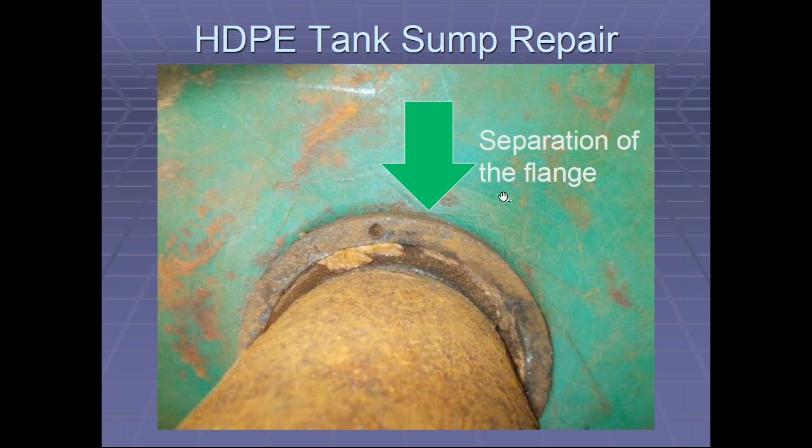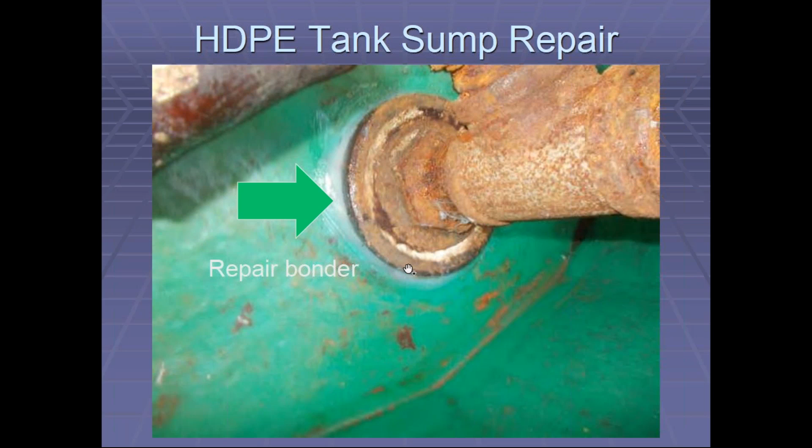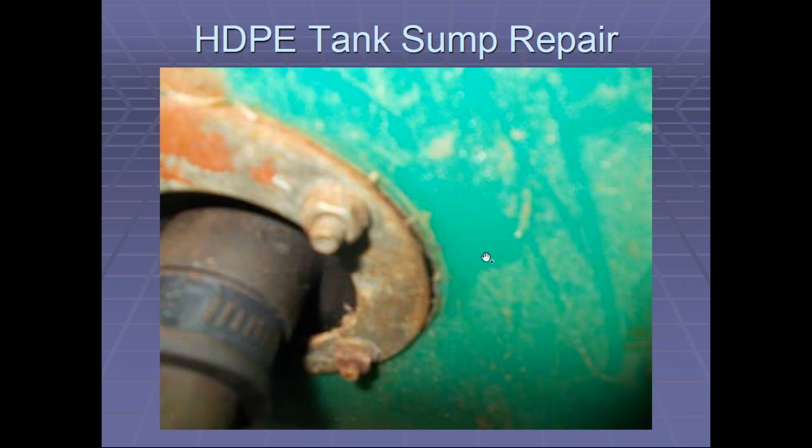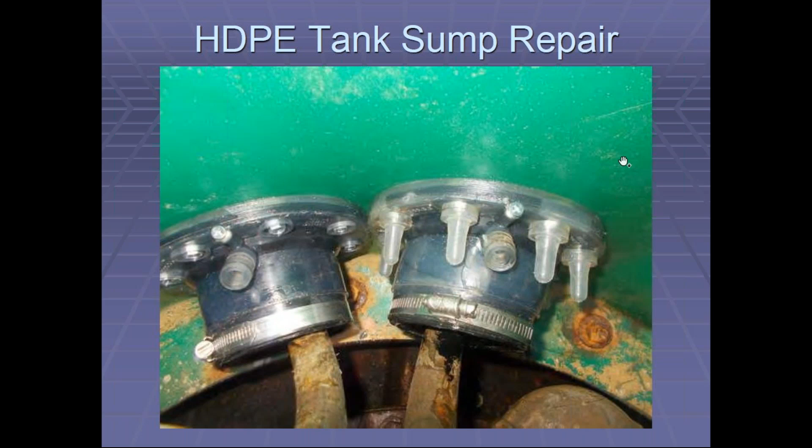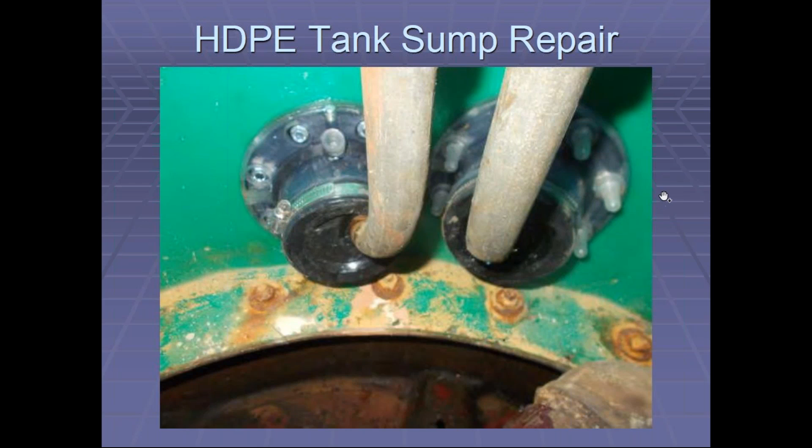More polyethylene tank sump repairs. Here we see some conduit fittings that were in need of repair. Upon closer inspection, there was some separation, and what caused the failure here was the separation of the flange and the sump. We had to go ahead and remove the old fitting, clean it up, and what we ended up doing is an encapsulation repair of these fittings in order to obtain passing results. As you can see, the fittings don't need to be perfectly in the center. A lot of times you can have fittings coming in on harder angles or not perfectly square, and you could still make these repairs with a lot of the penetration repair fittings that we have available to us.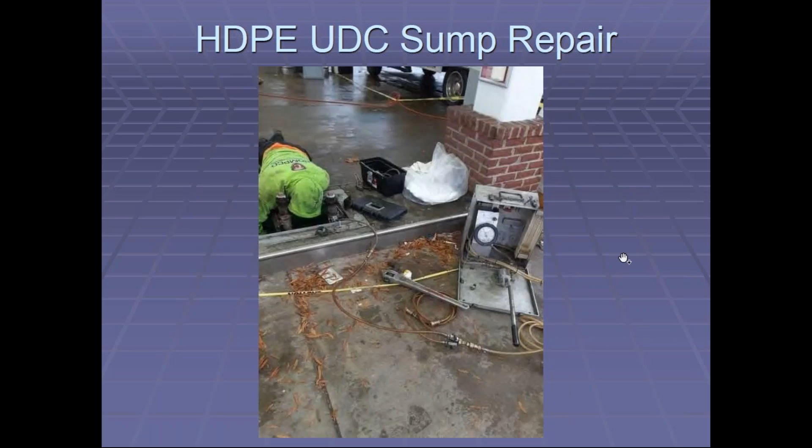So here's the post repair fittings, another encapsulation fitting. And here's a repair of that piping interstitial boot that had to be repaired. It was another split boot repair, where we took the old one off, put the split boot on, and now you have a new fitting where you'd be able to hydrostatically test the sump, and also perform an air test of that piping interstitial space if necessary.

So now we're going to get into some really ugly photos that I've been able to find over the last several months of some unrepairable sumps.

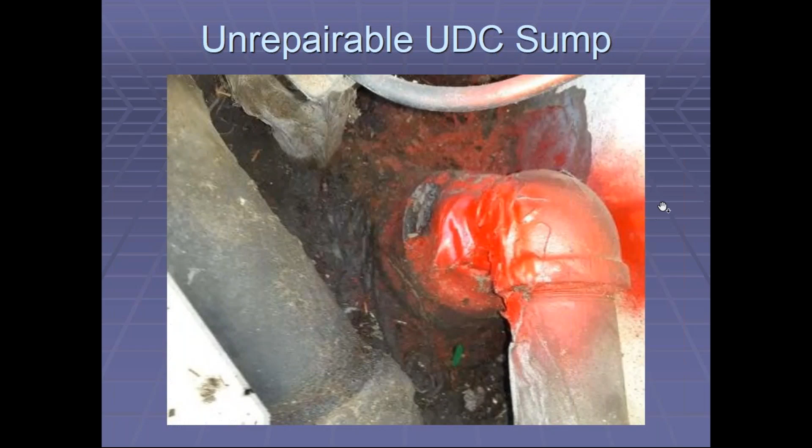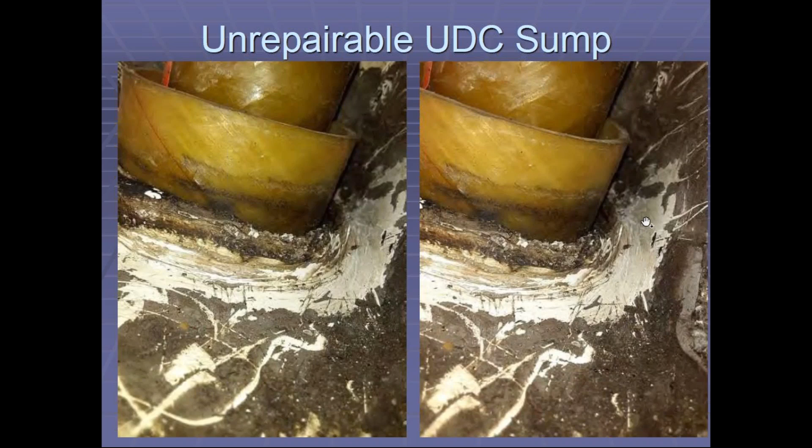Here we have an under dispenser containment sump similar to what we've seen earlier. However, the cuff at the bottom of the sump here was so chewed away, we weren't able to get the new repair fitting to properly seal. Every time we tightened up this boot, it kept popping off because we could not get a good seal here. So unfortunately, this dispenser sump, we had to tell the owner that we weren't able to make the repair, and this sump was going to need a replacement instead of just a fairly simple repair.

As Tony mentioned in his presentation, a lot of times the piping comes into these sumps on extremely hard angles, so trying to get repair fittings on in this case is nearly impossible. So the determination in this case was, again, proper repairs weren't going to be able to be made, so replacement was going to be the best option.

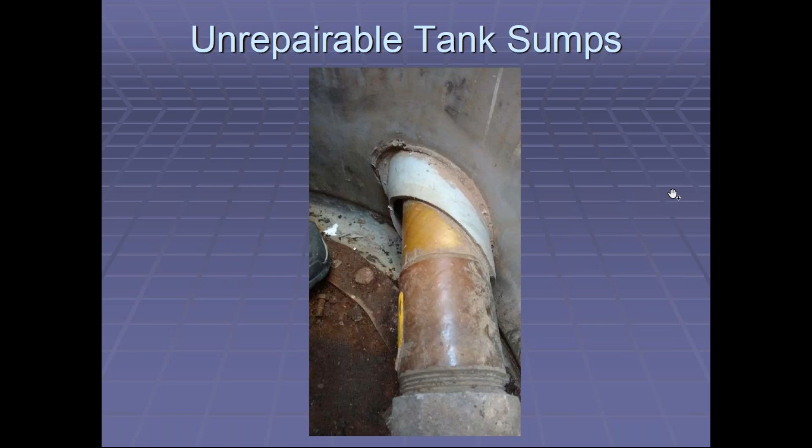Here you'll see some polyethylene sumps which have multiple cracks and separations. If you go into the standard, NLPA 823, it talks about the limitations of high density polyethylene repairs when it comes to cracks and separations. So take a look at that if you're looking at making structural repairs, so those limitations are not exceeded when doing those types of repairs.

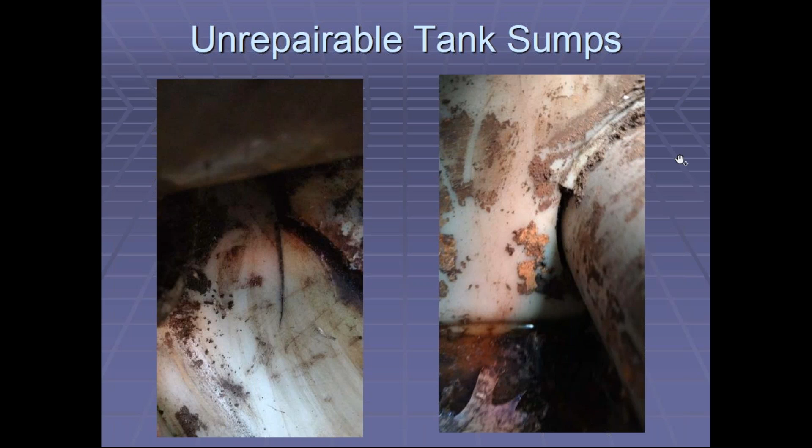Here we're having a lot of separation between the pipe and the containment sump wall. Oftentimes we have fittings that are butted up almost right against the containment sump. Unfortunately, again, not every sump is capable of being repaired. Sometimes we have to tell owners that things need to be replaced. It's unfortunate - we try to repair whatever we can, but in some cases it's just not possible.

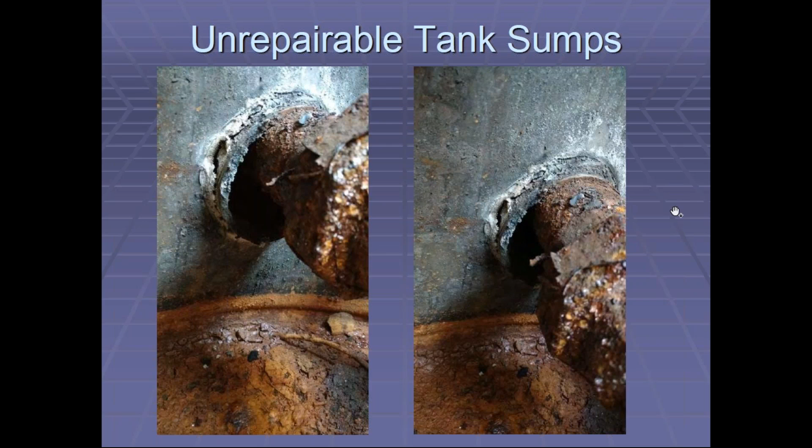Here we have, I don't know what's going on with some of these fiberglass sumps, but it appears that there were two parts to the sump, and it started pulling away from one another, and somebody tried to repair it by putting a steel plate on there and tacking it to the fiberglass so it wouldn't separate anymore. We made the determination that we're not going to be repairing this sump and taking on that liability.

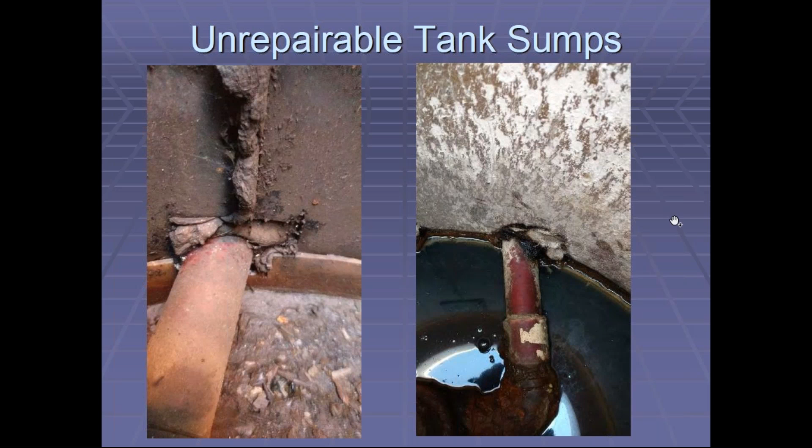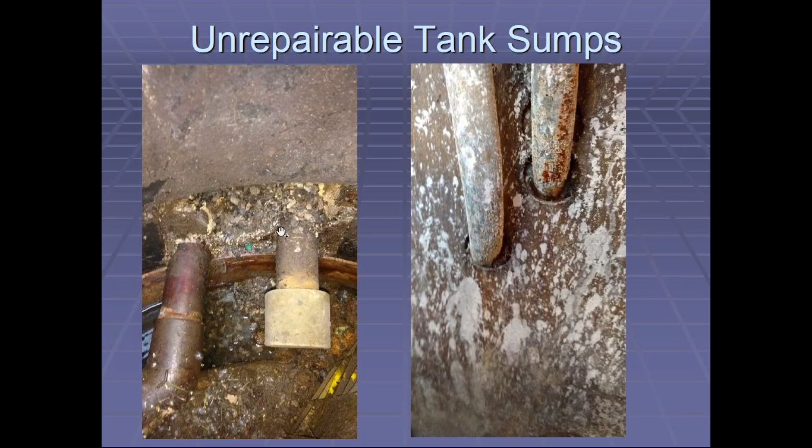Some more ugly photos - if you look at enough work orders, you're going to see a lot of these sumps that are unfortunately out there, and hopefully with the new regulations, they're going to be identified, and a lot of these things are going to be either repaired or replaced over the next several years. So here we can see no penetration fittings on conduit, a huge gap in piping that's coming into containment sumps, more sumps that are just unrepairable.

Conduit fittings butted right up against the wall. We can't get a good seal on any types of fittings around these conduits when they're basically embedded in the wall of the sump.

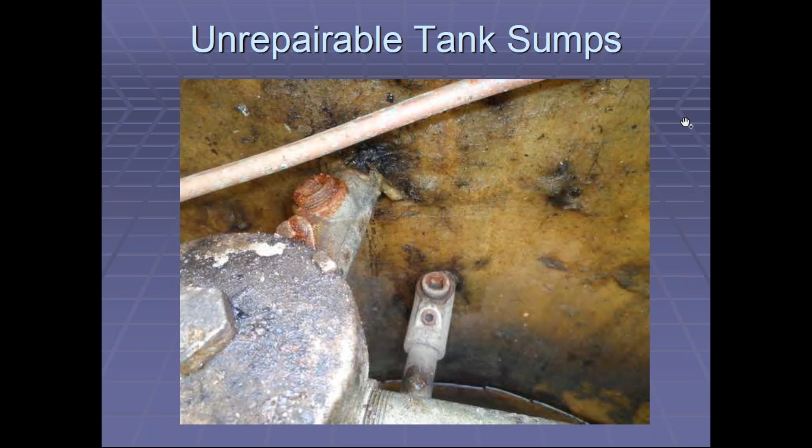Here you can see some contractors decided to spray some type of foam around the outside and also on the inside of the interstitial space here. We felt, again, it's just not a repair that we're willing to take on.

So like Tony mentioned, testing is an important part of the repair process, performed after repairs have been made. If you're going to test according to the standard, it basically follows PEI's RP 1200, stating to do a hydrostatic test 4 inches above the highest penetration or side-assembly seam of the sump for a minimum of 1 hour, with a loss of no greater than an eighth of an inch causing a failure of the sump.

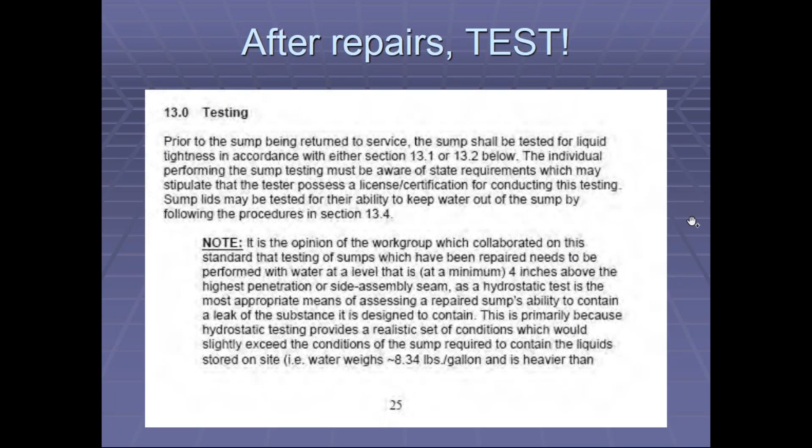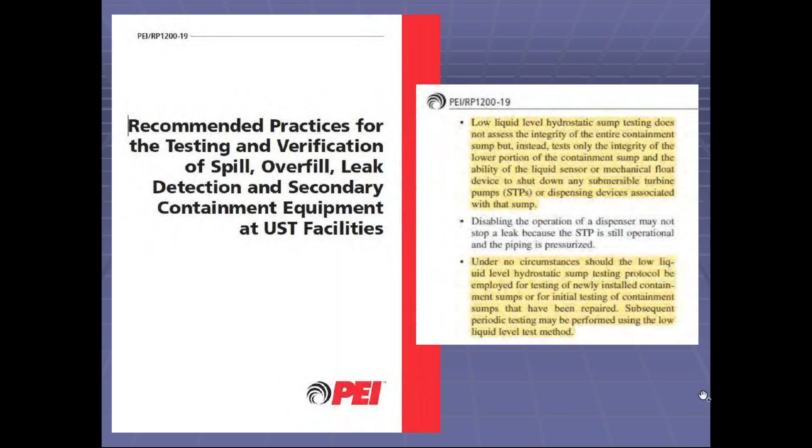Just to refer back to PEI's RP 1200, the 2019 version, we felt it was a very important caveat to put in there that, with all the low-level testing going on now, under no circumstances should low-level hydrostatic sump testing be performed for newly installed containment sumps or for the initial testing of containment sumps that have recently been repaired.

If owners are asking contractors to do low-level testing immediately following repairs, I highly doubt most AHJs would allow that, but we have that in the standard to say that's something that shouldn't be done. It's also covered in the NLPA KWA standard, to test a minimum 4 inches above the highest penetration or side-assembly seam. And like Tony suggested, if the authorities having jurisdiction allow for alternative testing methods, such as the dry sump method or vacuum testing methodologies listed on the National Workgroup website, if the AHJ finds those no less protective of the environment, those methods could also be employed for testing after repairs.

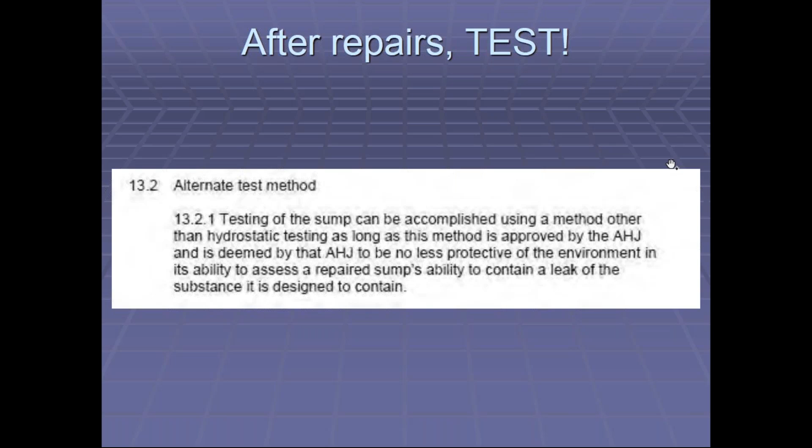With that, I'm going to conclude my presentation and I'm willing to take any questions or concerns you might have. Thanks for your time this afternoon.